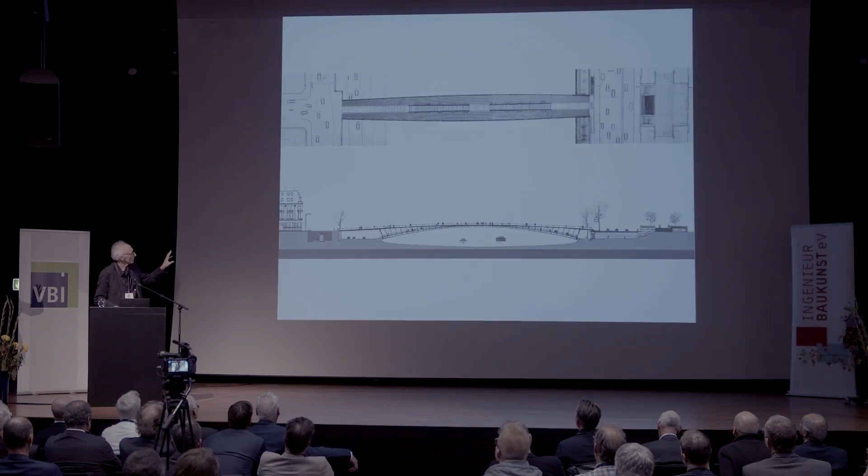for a moment. In this Solferino bridge, what I wanted to do is, I wanted to open a window to the sky, so it's a relationship between the water and the sky. So the inside, as I showed you before, it's exactly the same picture as the one when they built the Alexandre III bridge. And then you come up to the sky, and then you have a balcony over the river.

So this one, for example, is between Strasbourg and Kehl. And if you look at the middle, this middle line was the border. So I'm speaking about transgression because exactly at that place of the border, you can feel that you are together now. And it was time for war, but now it's time for, let's not speak about that.

And then you are in the middle. What you see underneath are the dampers. So we could speak about the dampers, but we have to speak about the bench also. And being on the border. And then when you are here, nobody would have been there before.

And you are in between, you feel that you are in between the Forêt Noire and the mountains, and you feel that you are in the same geography, same landscape. You share the same space, and not one against the other. So if the people could have gone there before the war, maybe they would not have made it.

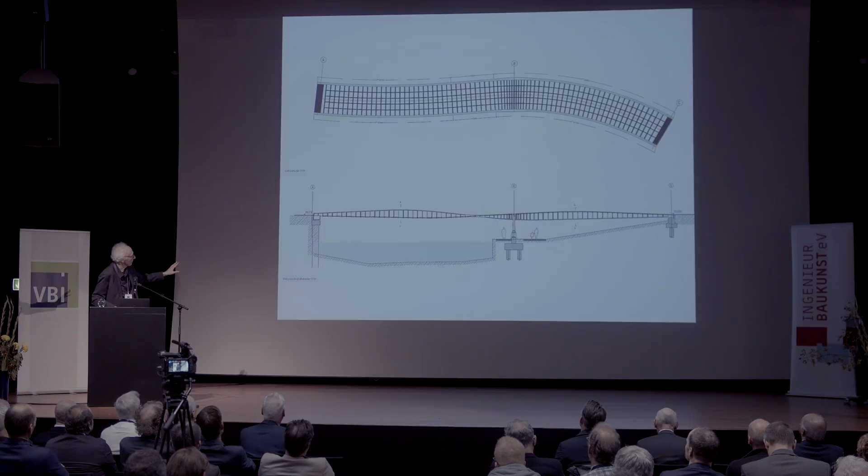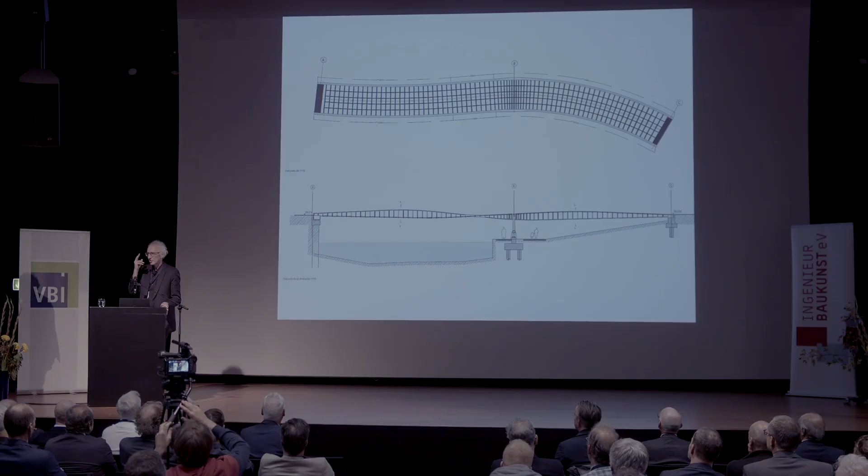And then you have this moment distribution where you have the zero moment, and then we have this beam passing through. So you have that. So you are passing from the top to the bottom, and then you are bending. So it's very easy to take, let's say, two elements, the manufacturing and the moment distribution, to build the cross section.

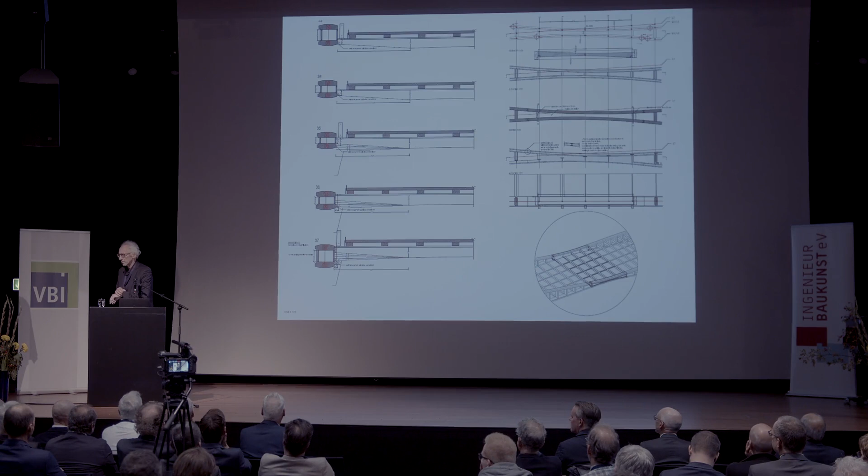I don't remember how much time I have. We have now 14 minutes. 40?

14. Oh. And so this is very important, to be in relationship with the factory. Nowadays, I think more than the AI, the most interesting thing is that now we are connected with the factory. From my office, I can draw and give geometry to the factory in China, like you do with the concrete.

So this new relationship is much more important than look at the people working on and understanding what is a welding. How do you show welding? What is the relationship with the people that are doing that? And then suddenly it comes here.

I don't remember, but here on the right side is the office of a very... Who? Buro Happold. So I was sure that I would lose the competition, but it never happened again.

And you see, I think it's quite interesting, this relationship with the way of making. I used to be teaching, my master class was material of thinking, materiality to think. And speaking about materiality, one of the last ones we did is one in Luxembourg. And in Luxembourg, we use not only steel, but stainless steel.

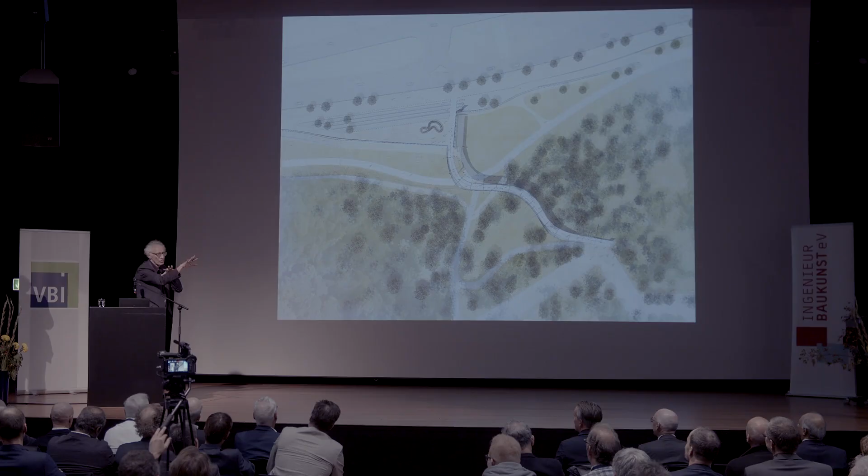And then, actually, I decided to pass through the frondaison, the canopy, and leave all the trees in place. That's why, it's not because I don't know what is a straight line. And so we decided to pass from one side to the other and keep the trees. Afterwards, this gives this impression to be inside the light of the trees, changing the light day and night and during the seasons, winter and summer.

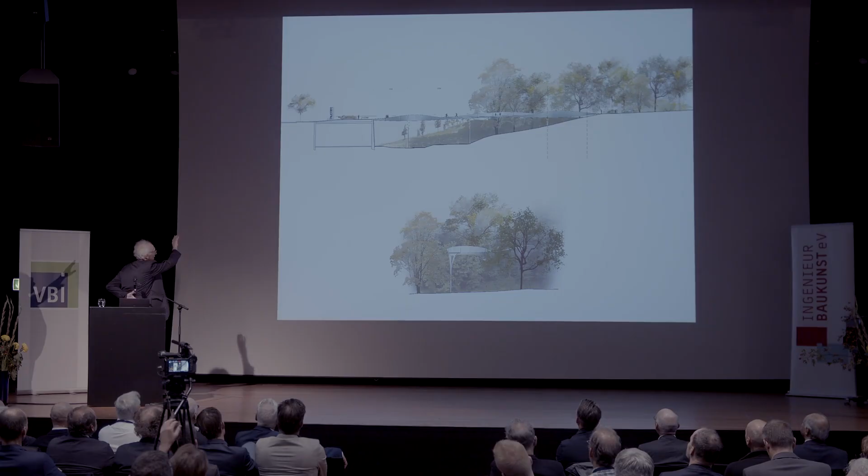So we use for that pure stainless steel. You will see that in a minute. And then this is the curve of the distribution of forces. And as you can see, it goes up on one side and on the other, and it's obviously useful. So that's a very important moment, because the workers had to spend 5,000 hours on a mirror. And this was the beginning, before.

Oh, you see, it changes all the time. This is winter. We had no problem with the birds. No, just in case you have a question about that.

Actually, we had one between France and Germany on the bridge, because they thought that the birds will knock the cables. So they put a large mesh just to collect the birds, but they never collected any bird. And I was very upset about that.

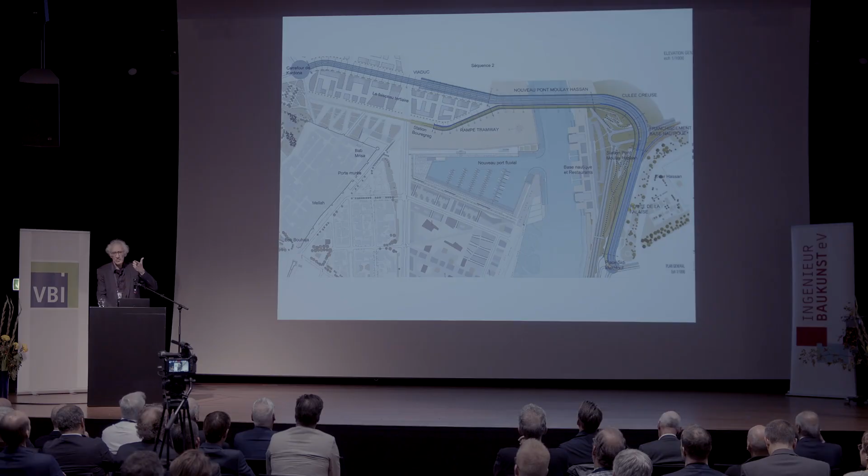You see. So, just now, somebody spoke about Laurent, you spoke about the underneath. So I'm speaking about the roof. I said that the bridge can become a roof. And this is one we did in Morocco, in Rabat, between Rabat and Salé. And this was concrete.

To have arches bigger and bigger and making a real arch in the middle. But I wanted to show you that because of the idea of the roof. Public space, and I tell you, this is a public space. It's 800 meters long, and you see the people are playing music underneath, and it can become a market.

I made a real mistake. I said it could become a souk. So they decided to make it clean. So now there is a cop every 200 meters, and it's perfectly clean. It's too bad. But you see this idea of the underneath.

We did that also in a recent one. We used the same technology as the metro in Paris in the 19th century. And we did these molded columns. So they are molded like the metro was in Paris. And in that case, it becomes a roof shared with the garden. And all the story is here.

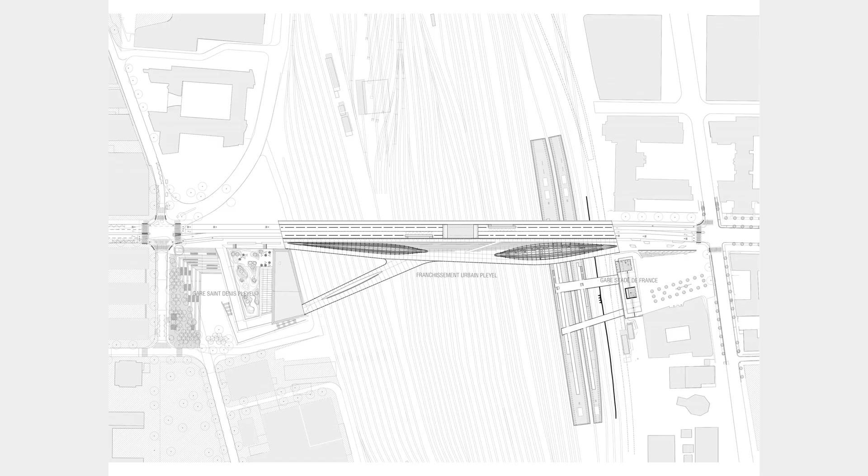Instead of asking for a cut on the planning, if you want to put one pillar here, you have to ask it not only 1 year before, but now with the new reservation, you have to tell them 2 years before, exactly the day and the hour you will do that. And if you've been on some site, you know that nobody knows what will happen 2 years later.

But in that case it was. So we decided to use this kind of nef, this kind of structure. You may not understand why it's like that, but this straight path has a slope of more than 6%. So for the disabled people, we had to do this whole slope going under 4%.

At that time, the slope in France and Germany is now the same. But when I did the bridge between France and Germany, somebody spoke about the rules this morning, I'm speaking about the idea of the place where people can meet and all that. But the law for the slope on the German side is not the same as on the French side. So we could do things that were not regular.